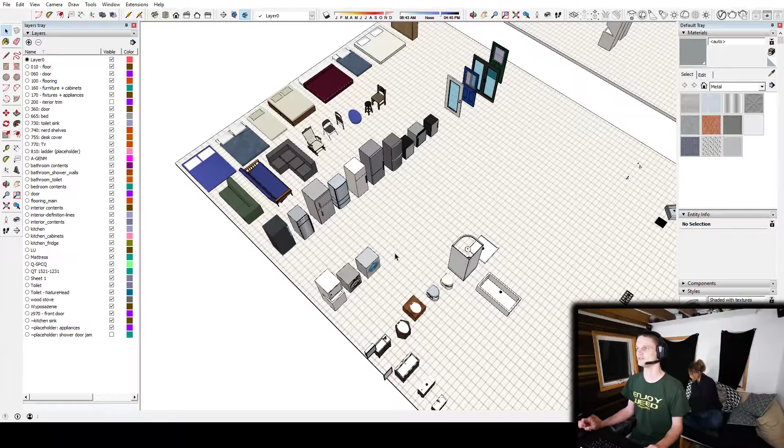I'm actually just working on a little file here with a bunch of pre-made bits in case I can't get a hold of the 3D warehouse when we're doing our presentation at the Jamboree in Texas, which we're leaving for in just the day after tomorrow. We're heading down to Arlington for the big tiny house annual convention, and we're going to be doing a live tiny house design just like we do on these streams.

So I'm just doing a little preparation. This is like I copied the contents out of different tiny houses that we've made on streams and made for other reasons, and I was just reorganizing the stuff here.

If you're just joining us, we're just waiting a few more minutes for some people to show up before we actually start the design. Start thinking about a length of trailer you want to start with and any particular feature that we might want to work into the design.

I like to assign space to something specific that the person who's going to live in this house might want - like what is their hobby or their work, something they're going to do with the extra space in addition to the necessities like bedroom, bathroom, kitchen. So give a little thought to that as well, so we can build a tailor-made tiny house specific for the intended owner's needs. But I'm just going to take a few minutes here.

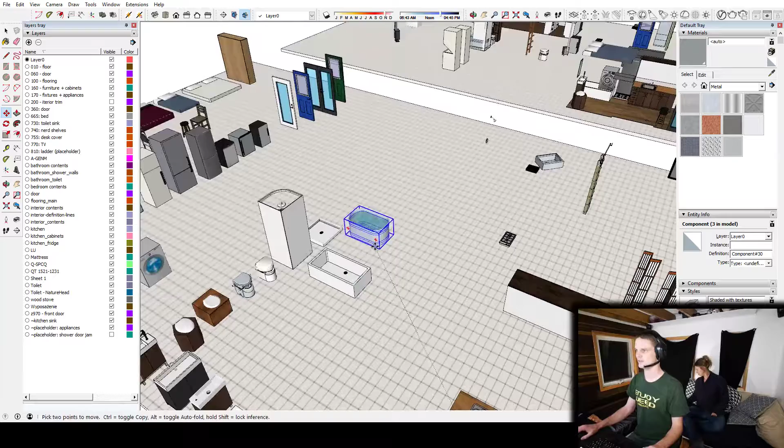In the meantime, I'm just moving some stuff around. You might recognize if you've been on previous streams, we put this horse trough-like bathtub. I actually found another bathtub from a different model, and I have all this kitchen stuff, which is really cool. I'm going to try to reuse some of this to speed things up - should be nice rather than building all this stuff from scratch. It's got a couple kitchen cabinet things already made here.

Just lining these up. So do we have any suggestions on how to get started? How many people do we got? There's only 7 people.

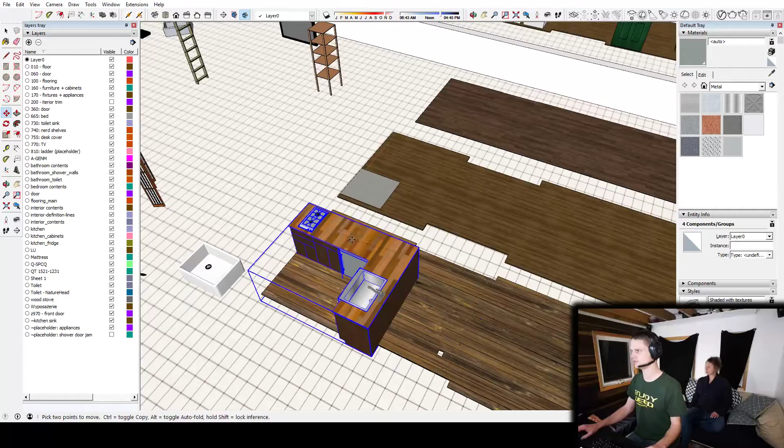It's pretty late, it's true, we are starting a bit later than usual. Batty's suggesting 24 foot. 24 foot, all right, then we shall do a 24.

So I'm just going to get the document or the file open here for 24, a standard 24 footer. It's actually going to open the different file here and get the 24 footer going. All right, so just opening up a 24-foot trailer here.

My headset just cut out, but I can see that it's still working.

All right, so our usual question is, do we want thick floors, thick walls, meaning like 2x6? The floor could be 2x8, or even bigger if you want to go crazy for insulation. The walls could generally be 2x4 or 2x6 - anything more than that would be a bit extreme for a tiny house. So let us know in the comments what you want to see: is this for a cold climate where we want to really pad it up and thicken the shell, or a moderate to warm climate where we just do standard 2x4 walls?

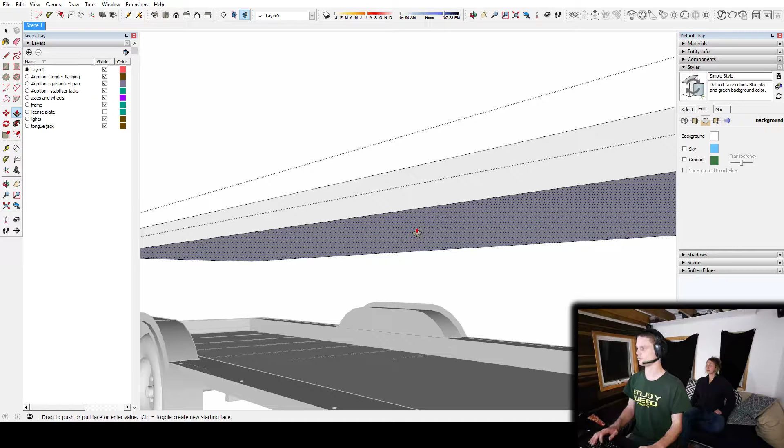Let us know what you think, and I'll just make a little initial thing. 2x6 walls, 2x8 floors. Okay, so we are going to do a bit of a thicker one. So what I'll do is pull this down - 2x8, maybe like 7.25 thick, and I'm gonna pick a wood texture to represent the wood framing.

So what we could do is set it in with 2 inches. 1 inch is probably enough, but let's see what we end up with here if we go with 2 inches.

Like this. Someone is suggesting we make one with a fireplace. Okay, haven't done one of those yet. Well, the fireplace is the heart of a home, right?

Hear that all the time.

So with a thicker floor, we're using the Iron Eagle trailer because that's what we've got already made. So there's the sunken cavity inside there. Fill that up, it's 6 inches deep. So when we do a really thick floor like this 2x8, it's going to sit up above the deck height.

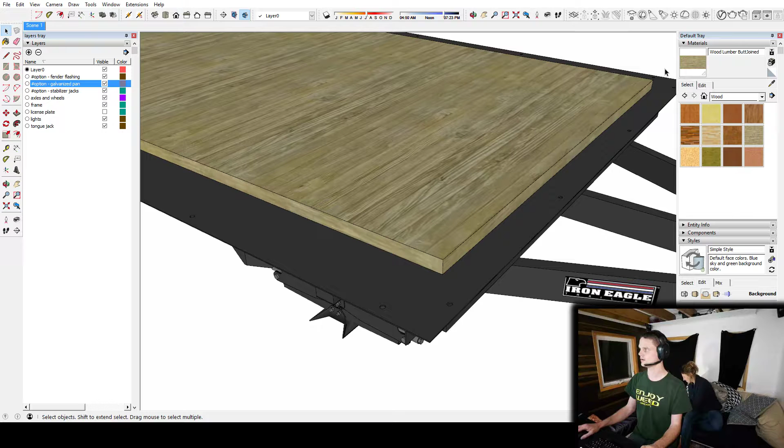That kind of goes hand in hand with wanting to insulate more in general, where we're actually going to lay down a thermal break on top of the trailer before setting down the walls. So just to represent that, I'll go like this. This is just a really rough block-out approximation of that.

Oh yeah, I've got to go around like this.

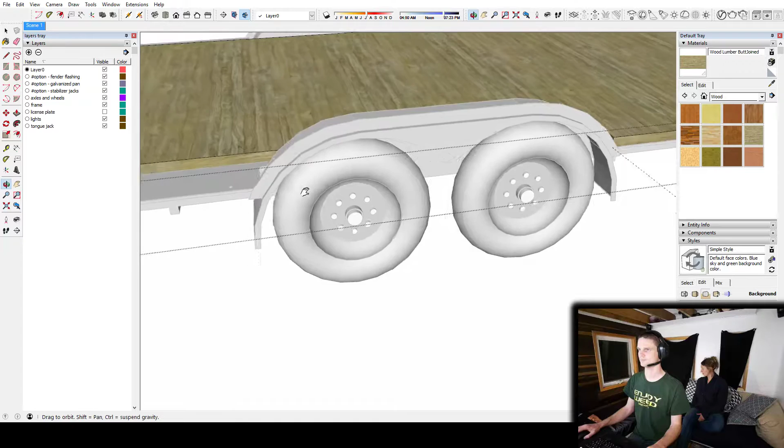This is just going to represent the framing and insulation and stuff that you'd lay down around the perimeter there, like that. And then of course we'll lay down a plywood subfloor. I'll literally just draw that right around this.

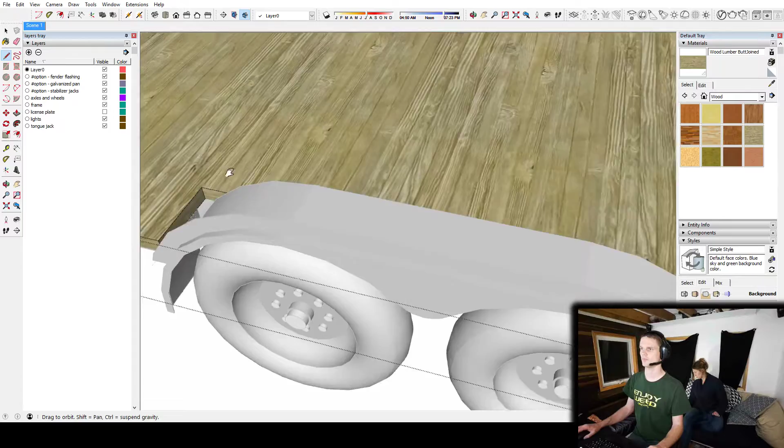Oh, and well, we'd go like this as well, in to there. Like this, line that up like that. And then start drawing that. I'll just draw around here to do the subfloor.

There you go. And then pull that up, we go 3/4 for the subfloor. Get a group, give some plywood. And then we'll do some walls.

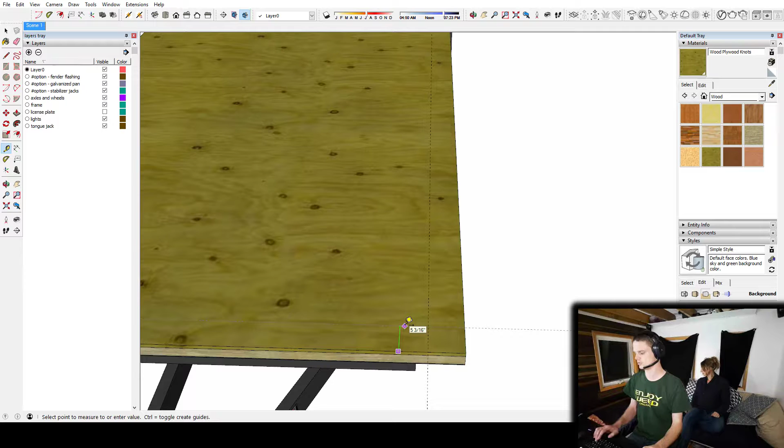So we're doing 2x6 walls. We're just going to say for now, for simplicity, that the sheathing is going to go on the outside. So this would be to the inner face of the finished wall. It would be 6 inches from the outer edge. Normally we'd do 4 for a 2x4 because it would be 3.5 plus a half inch.

Someone's asking what the weight capacity is for the trailer. This one is a 24-footer. Yeah, it's either, I think it's 14. I'll open the other file here.

But in the meantime, I'll start drawing the walls. Pull that up.

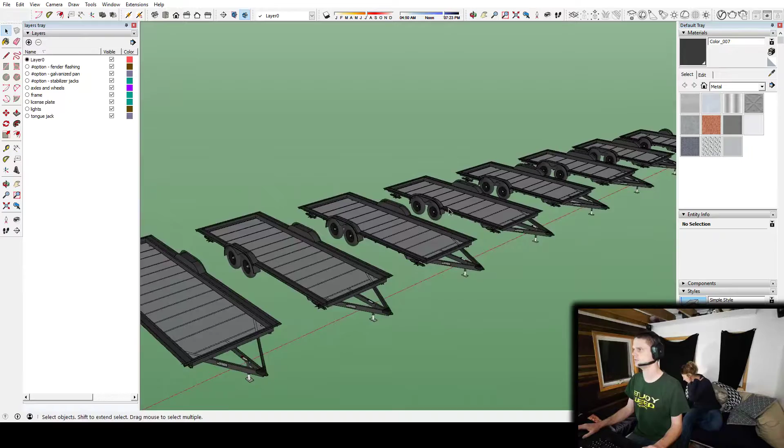Do we want to give, let me just check here, because I think these are the 5,000 and these are the 7,000 pound axles. Is this the 24-footer? Oh, the 24-foot, yeah. So you have to check with Iron Eagle directly, but I believe it is 14,000 pounds. Yeah, because ours is a 20-footer, and it's 10,000 pounds with 2 5,000 pound axles, and then they put 7,000 pound axles on anything bigger than 20 foot until you get to 28 feet, and then they put a triple axle. So short answer is I think it's 14,000.

Do we want to put some color or a texture on our walls for this build? Because they've always been white, which is fine, keeps it nice and simple, but we could do a nice pine blind. Get pine blind.

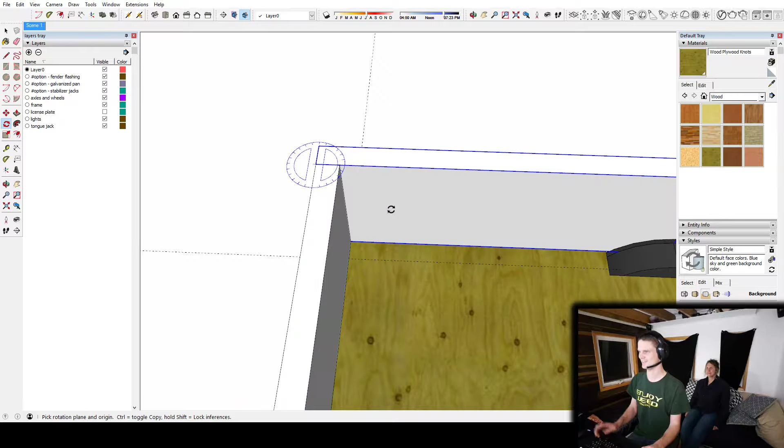I'm getting good at this. Well, as I say that, I get stuck in the model, but I'm getting good at this process. Slapping together the outer structure here. Slapping the base, man, slapping the base, man.

What if it's cedar and not pine? Cedar blind? Cedar blind? Has to be better than that. Yeah. Pine blind. Cedar.

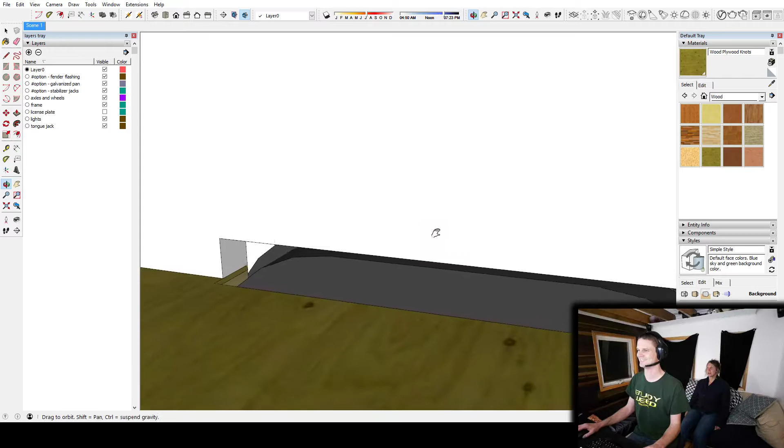Gonna go crazy here and use the offset tool because I'm a boss. Go 1.5, pull that out to there.

Is somebody making fun of me and you're laughing there? No, someone's saying slap at the base, man. Slapping the bass, man, I slap it a bit. I slap a bit of bass.

Okay, I guess, let's start with the references here. I want to close up these wheel wells.

We should do a live stream where we communicate solely in references to movies. I don't feel like that would be very hard. I don't think so either. I feel like that's kind of like part of my normal existence at this point. Human interaction, yeah, yeah.

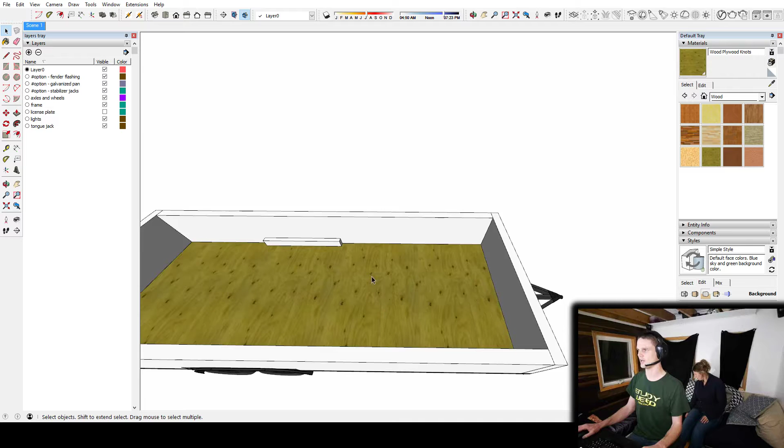Okay, so we got a shell here. I probably should have been asking ahead of time what you guys want to see in here. I guess so, fireplace. I'm gonna draw on a floor while we gather some more information from our viewers.

If you're just tuning in, you guys are telling us what to do, like how to make this layout, this tiny house. So we're working on 24-foot long, and we just put the floor structure in. We got 2x6 walls, so they're a little bit thicker, so you're only losing a few inches total. But let's keep that in mind. And we want to figure out what to put in here.

So basic things would be like, is a bathroom at the back or at the front, or with a tiny nest, our design, it's like a split thing where the shower and the toilet are separate. And then of course we need to balance that with where's the kitchen going? Is it going to have a loft with a bed? Do we want to go with like try to put a bed on the ground floor? If we do, keep in mind that that's going to take up a lot of floor space.

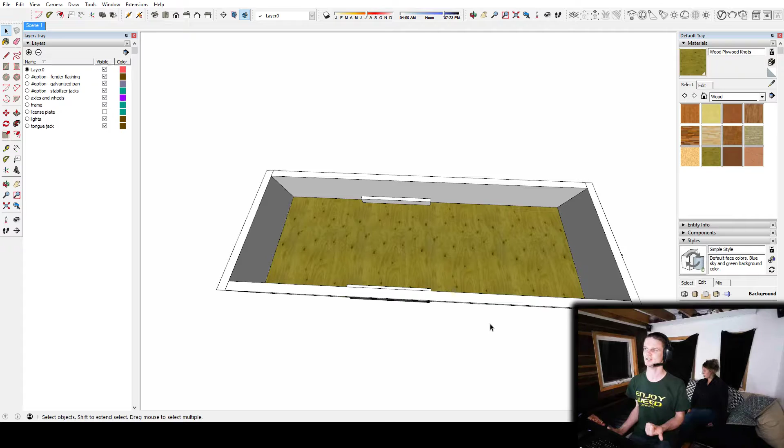The main suggestion so far has been to put a fireplace in. I got another suggestion for 2 queen beds. 2 queen beds, okay. So we could do like positioned, do we want them each on their own loft? Let us know in the comments.

While I draw in the floor here, oh, I can actually pick a nice floor texture from my thing. Uh-oh, what's going on here? Did I not? Oh yeah, we're good. So I'll just make it well, like a quarter inch.

Someone is asking if we've ever designed one with bunk beds. Oh, that'd be cool. Yeah. Can we do like queen bunk beds? Queen bunk beds, man, that's like a really good idea. I mean, queen bunk beds would imply that you're sleeping like 4 people, which is a lot.

Sorry, you're 2 couples, or like kids that are sharing a bed, but they wouldn't need that size. Go ahead, you could have the bottom as a couch, like a futon. I don't know, let us know what you think in the comments.

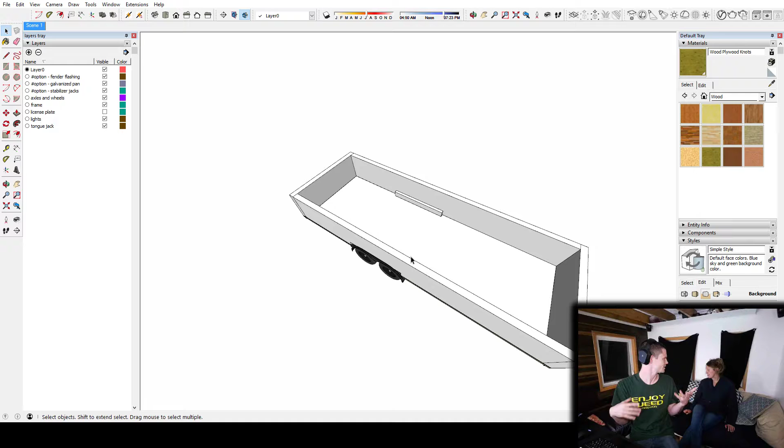What's the biggest vote? So we got 2 queen beds. We could put them on separate lofts, or we could do some kind of bunk bed thing. 2 beds on 2 separate lofts. Okay, I'm into this bunk bed idea, yeah, I want to keep that in mind, that's a neat idea.

So here's a fun question. I mean, these aren't great, but keep in mind that I can change the tone, make it lighter or darker or more or less saturated brown or whatever. But A, B, or C for the floor, and if you want some kind of modification, let us know in the comments. First one gets it.

C, okay. Now, I think I need to copy the object actually in order to get the thing. There we go. Oh, there we go, okay. And then leave it like that, or I think that looks pretty good actually. Let's just leave it like that.

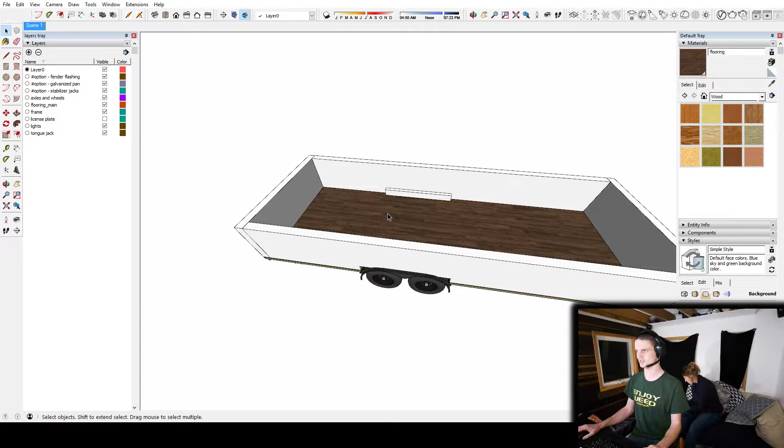So we want 2 lofts is what we decided, is that right? So how much space do you need under the loft? I mean, 2 queen beds, either there's a lot of people living there or you're expecting guests, in which case you might need to account for leaving quite a bit of headroom so that tall people don't bonk their heads.

So what do you guys think for headroom under the loft? So in the tiny nest, I'm like a little under 6 feet, like 5'10 and a half. Our loft height is 6'4, and that's what I usually default in these designs too, because I know that it's safe for me anyway.

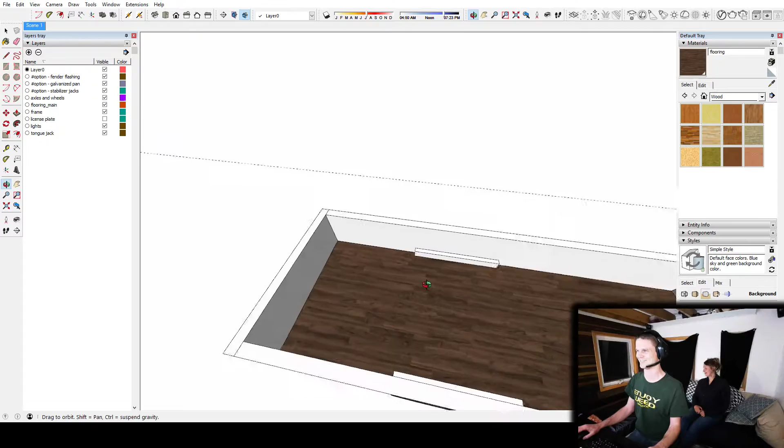So I guess I'll just go ahead and do that unless you guys want to see something different than 6'4 for underneath the loft. Do you have something to say? Jake is the size of Shaq. Yeah, 6 foot, yeah, I'm like 6'10. So someone's saying 6'4 it is.

Is the consensus bunk beds? I kind of like the double loft idea. You know, okay, do double loft. The double loft was I think the first suggestion.

I really like bunk beds, so I promise we'll do bunk beds when we get back from the jamboree. So in a week or two, a little over a week, we'll do another stream and we'll do something really fun with bunk beds. But I do like the double loft because that is like a pretty practical thing that people would tend to want. Yeah.

So we want two queen beds. I just happen to have a bunch of crap here, not sure which one's queen though. I think this is a queen. How wide is a queen? Tell me on the stream. 60 inches? Somebody Google it.

Someone tell me the width, Google it. No, but oh, this is 60 by 80. Perfect, there we go. Yeah, we don't even need to Google anything, man.

Okay, so I think this one's probably the nicest: double loft, one for him and one for her. That's what the suggestion is, and they each get a queen. That's pretty lavish, but you know, loft space.

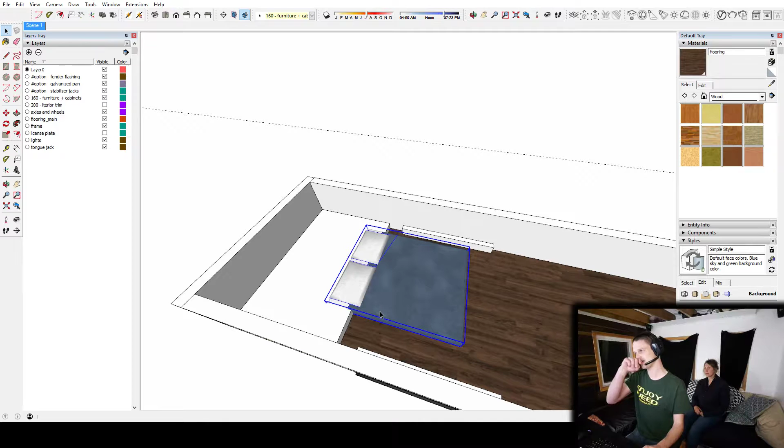This is the thing, as long as you are cool with being underneath a loft a lot of the time, then I say go for it. Put lots of loft, because what? Are you laughing at me or the comments? I can never tell, I don't even know what's happening.

Okay, lots of loft. Lots of loft. Lots of loft. I'm gonna color this loft the same as the floor.

What was I saying about lots of loft? Sir, lots of loft. Come on, sir, lots of loft. Come on, give me some love here. That was good.

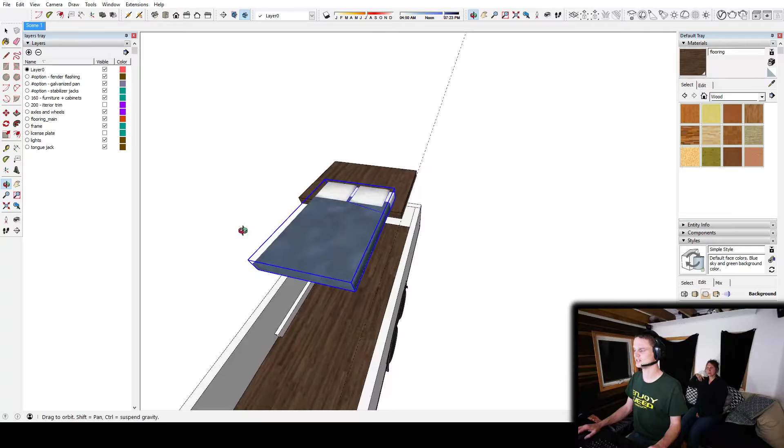Okay, put this like this. Oh yeah, so the queen is nice because, well, I would almost orient this the other way then, especially if it's each for only one person. You don't necessarily need to get in and go onto your spot, like if we have it oriented the other way, you just climb over me in the morning. But either way, this is going to be good because we can tuck it in, and even though there's two lofts, we can minimize the size of each loft. Is what I'm getting at here.

Right? Are you with me? Yeah, I'm with you. Okay, let's go like that, for lots of loft. That was really good, it was so good.

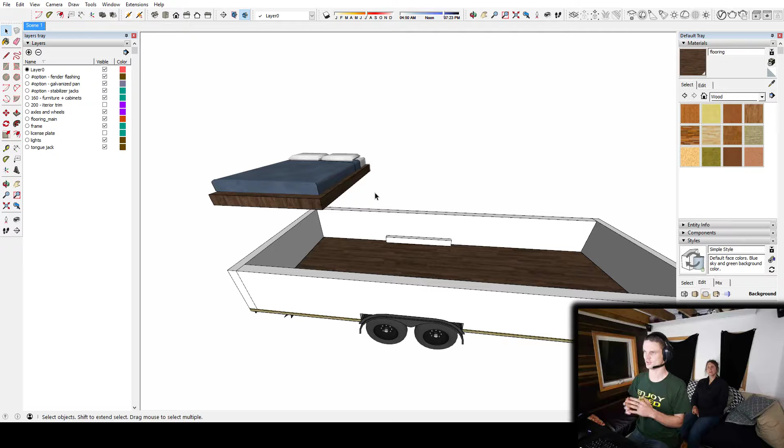Love you. So, okay, so access to the lofts. It's really good to work on tiny houses with a priority in mind, like we want to fit two lofts each with a queen size bed as the priority. So we're gonna put that in first and then see what we can fit around it. So the next question is access to the loft.

This is just big enough for a bed, so assuming you'd want some kind of nightstand type of surface, pull this out like at least a foot. But how far should it come out is the question for you guys. And then I'm going to duplicate this and put it on the other side.

And do you want me to change the color of the beds? Go ahead and shout out a color if you want it changed. Floating nightstand, floating nightstand. So I guess you could just use hover attach it to the wall.

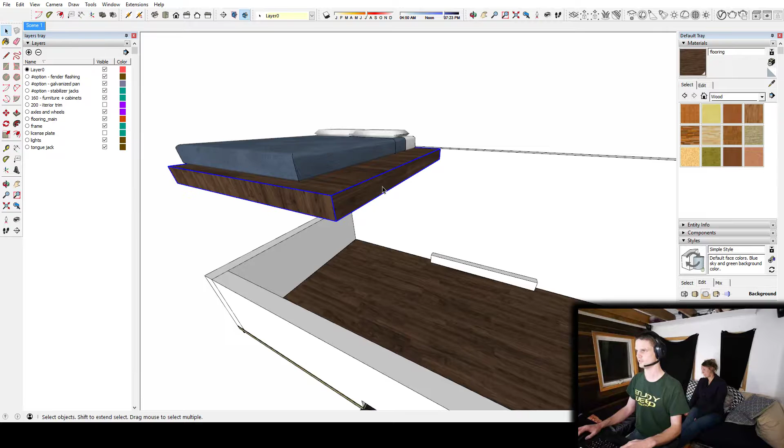Pull it out 2 feet. 2 feet total or 3 feet total? Because I already pulled it out 1 foot. Oh. So this is 2 feet total, that's what we're looking at here.

Now I am gonna make... so a property of going with thicker insulation is that you run the risk of running out of headroom. 13.5 feet, so that this is as high as the structure can possibly go.

And I'm just gonna put, where is it, oh glass. Glass, sure, there. Lock this. Okay, so that is the height, that's the max headroom we can possibly do.

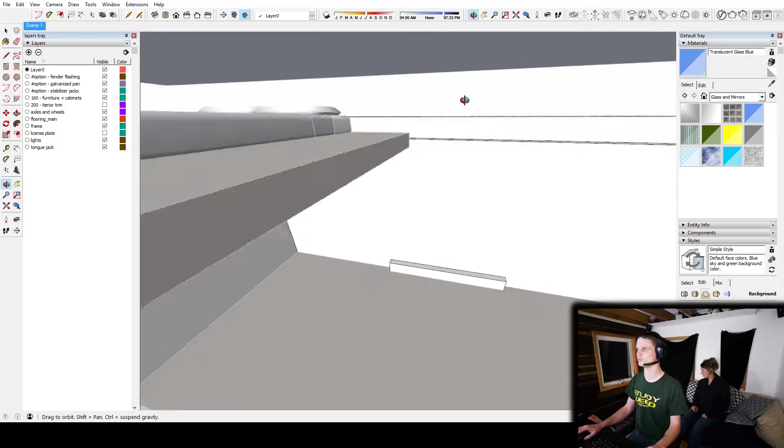So just to represent, we're not going to do the roof. We found that there's just not enough time to do a whole roof assembly in a short stream like this. So instead what I'll do is pull that wall up to max so you can get a sense of where it is, and I'll resize this so it's not in the way, but it's still there as a reference.

Just keep in mind that this does not represent the amount of wall that will be inside the house, not only because if you have a different shaped roof it could change it, but also because this top surface is literally the peak of the roofing. So assuming you're doing a... maybe I should draw that in.

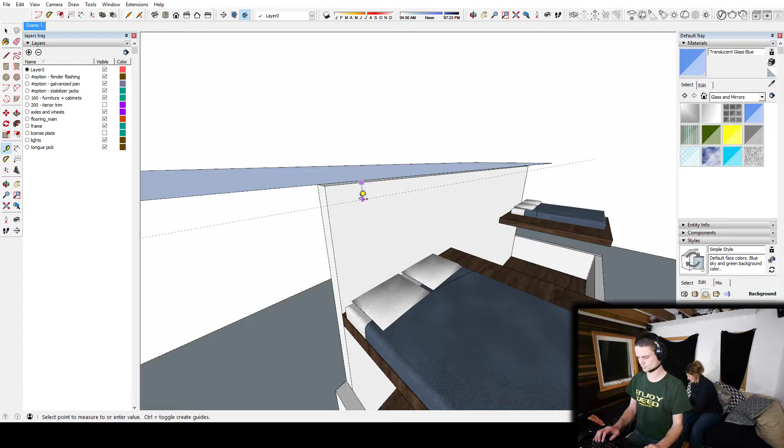If you're doing a 2 by 8 floor, you're probably going to do a 2 by 8 ceiling as well. So we're looking at 8 plus like 1.5, that's 9.5, and pretty much a foot really of layers. It's like your ceiling, your framing, roof sheathing, and then roof material. So right now in these lofts, we have a maximum of 3 foot 5 inches.

So just keep that in mind. Yeah, why don't we look at putting some other stuff in here? So someone is saying the beds are oriented wrong, okay, and Devin Connor is suggesting we put the bathroom under the forward loft.

Okay, I'm just going to make a mark on this.

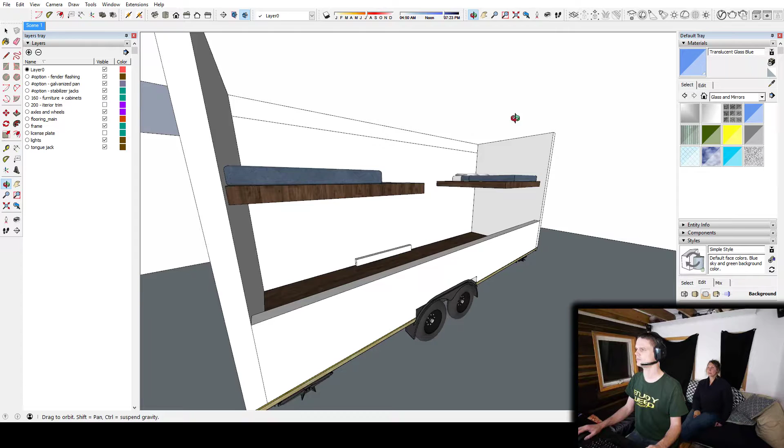So with the beds, my thought was if only one person is sleeping in each bed, orienting this way minimizes the amount of space the loft needs to take up and also maximizes this space. I guess it depends, because I'm imagining a shed roof, so then it would be about whether you could sit up in bed.

No, I'm imagining the same as you. I think they're oriented correctly, but if you're having a different kind of roof, that might affect it. If it's a his and her setup, you could orient them both with the pillows. You could have a gable roof with circular windows on both ends, and then orient the pillows there, so you sit up in bed and look at each other from across the way.

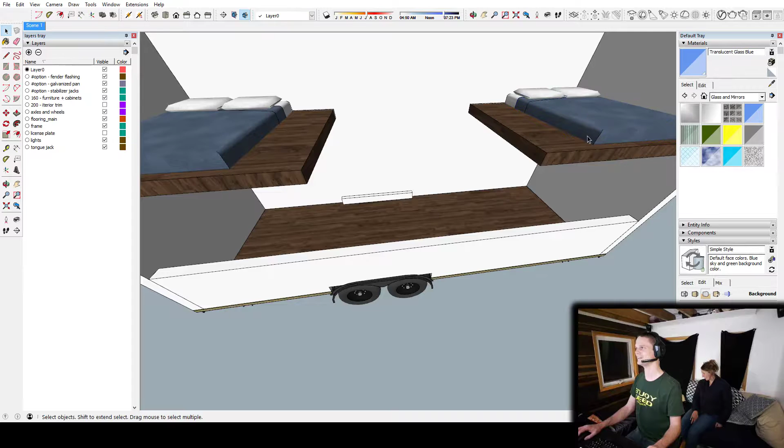But let's leave it for a second, because I think a big thing before we decide to change it or leave it as a concrete decision is that access to the loft is a big factor. We need to know what's going to be below it before we can decide how you're getting up there, and that can affect how much space you need to leave.

Is there a bathroom, stairs? Yeah, let's put the bathroom in. I'm just going to bring that down.

So what do we want to do here, just to end it? Yeah, that's what was suggested, at the end. So I'll grab a shower. I don't know that there's really anything better than a corner shower for a tiny house.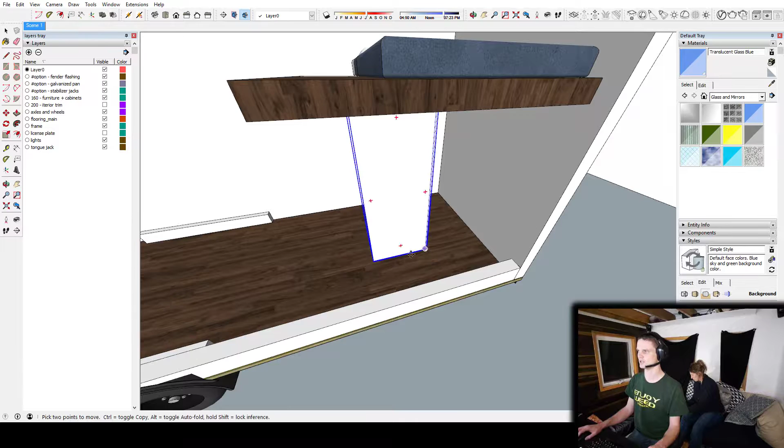Maybe one option could be a stall type thing, like a U-shaped cavity, so that you can put something else beside it. But you kind of put stuff beside it anyway. People are into the corner shower though.

Okay, so I just need to shrink this to this size, and I'm just going to undo the bottom of that so that it's like flat color.

Well, just because of the way we've got this, let's just go with it. It's funny, I always feel like we're making something different, but a lot of the time you end up doing something very similar, because it's just the natural feel of the space, you know?

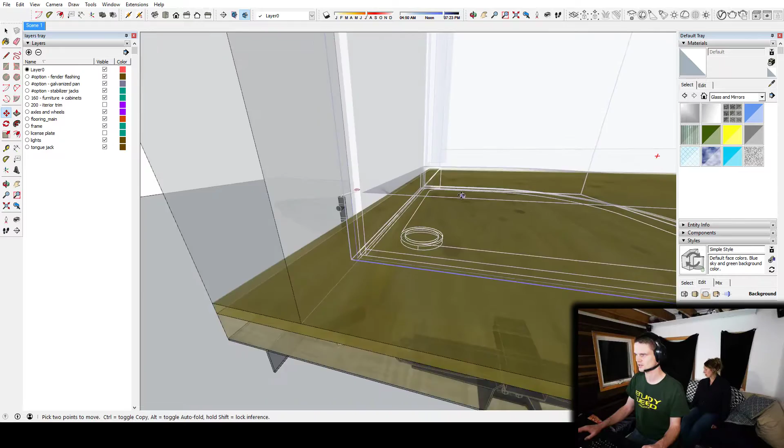So we could go there. Something that came up recently was someone complaining that in every tiny house, when you walk through the front or look through the doorway into the bathroom, you see the toilet, and that's not aesthetically good. I guess the problem is tiny houses have a long walkway, so it's typically best use of space to fill the sides, and then you end up with a central doorway into another space.

As opposed to putting it on the side, because then you've got to leave that whole wall open so that you can go in the doorway.

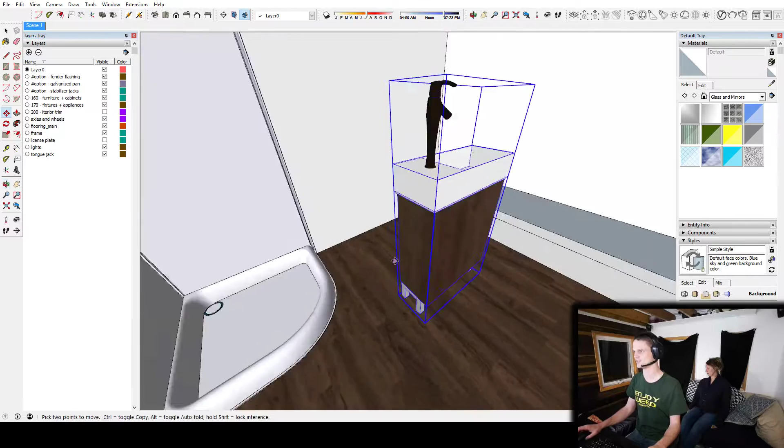Okay, here I've got an idea. We could do something like grab this one. This is actually awesome, grabbing all the stuff that's pre-made, because it's all stuff I've used for tiny houses in the past, so I know it's relevant.

Sorry, I'm reading comments. This is good. Someone says, I don't know, I'm not getting this. Someone says, 'so one wide and two deep, lol,' and then they said they couldn't help themselves. But I don't get it. I think it's a dirty joke. Okay.

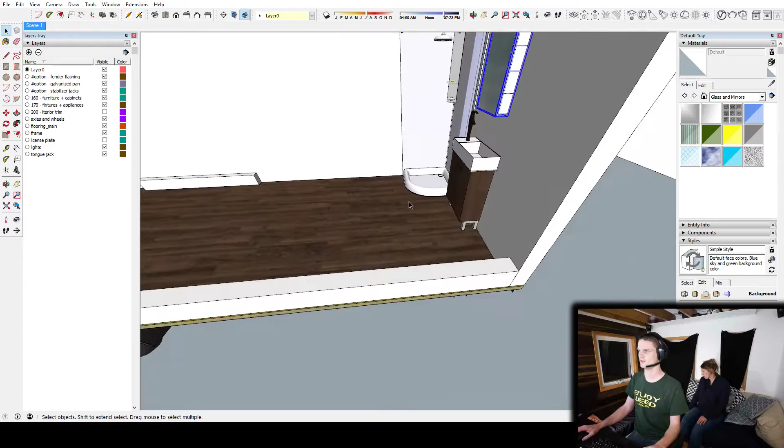So Batty is suggesting an escape hatch, either in the loft or one of the lofts, which could potentially drop into a washer dryer combo. Oh, I see, to throw your clothes down. That would be really sweet. Patrick McCowan is saying to pull the shower forward and put a toilet behind the shower.

Okay, let me just, I'm literally moments away. I'm gonna make this a nice thin wall. I'm just about to make something here. Just give me one sec.

This is what I was thinking was like... Okay, so Devin Connor is asking, if he wanted to save himself time...

Sorry, am I? No, go ahead. If he wanted to save himself time and materials, what would you think about using an already enclosed trailer to start a tiny house? Would it be able to support it? I guess it depends. I don't really know, are you talking about like an RV, or a pre-built tiny house shell that's already a tiny house?

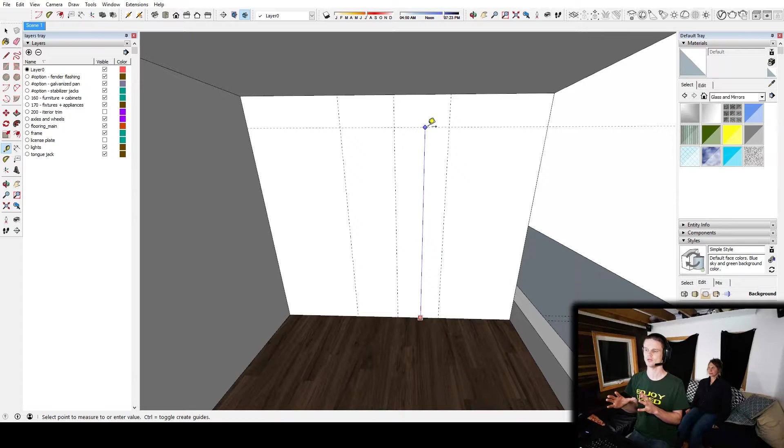My initial comment would be it can seem like you're saving something by picking up some used trailer or an RV and tearing it down, but that can easily turn into way more work to repurpose something, as opposed to starting from scratch, where you're putting in each element and deciding how to do it. It's like you're always moving forward, whereas if you have to fight something that's already there, it can be a struggle. I'm only speaking from having gone the new construction route with no experience tearing anything down, so keep that in mind. But yeah, that was a really poorly executed answer to that question. But there you go.

If it was even an answer to the question being asked. But regarding the toilet, this is what I was thinking, tucking it into the right side here and putting some shelving here. Let me just show you. I was already halfway to doing it. Let's do this like this. It might be a little bit - oh, it's probably too deep.

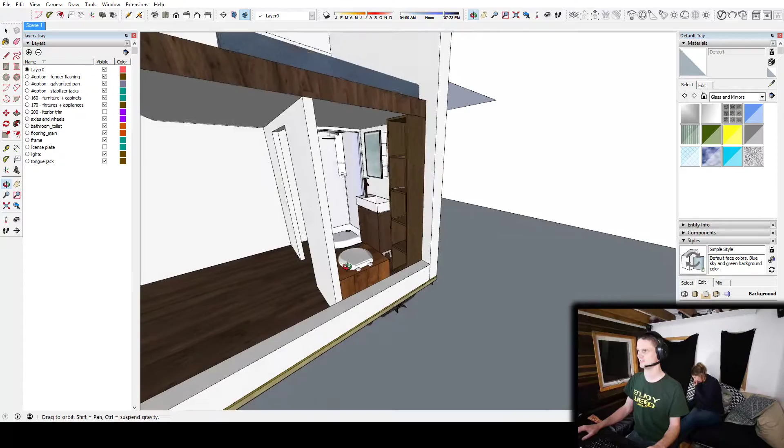And I would probably go like, make this white. Oh god, what's happening? And then widen it a little bit maybe. So yeah, this is what I was thinking.

This is an attempt to solve the issue of not wanting the toilet visible through the doorway, but at the same time keeping the doorway in the center so there's space for other stuff further back. But there was a comment about putting the toilet behind the shower, because I'm assuming what was suggested was, this is an extreme example, something not oriented this way but positioned that way. That would lead me to think the bathroom would turn into a long strip along this edge, more so than at the end, which is possible.

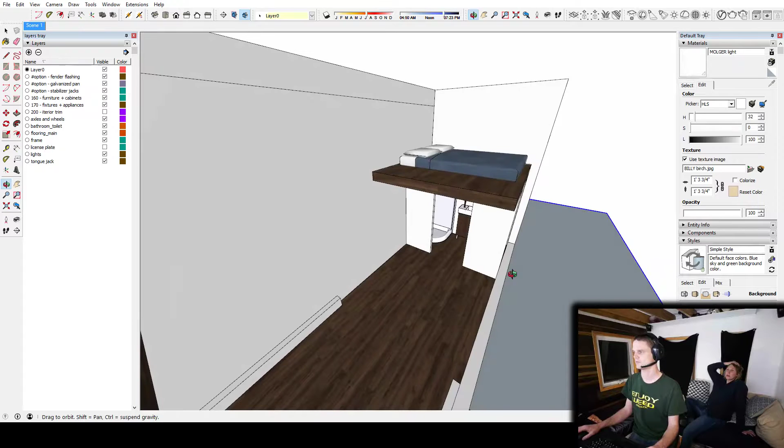You could close it off and then have the trap door, like how you had it before, so it was a bit longer, and then have the trap door and put the washer dryer combo in the bathroom. This is a good idea, I like it. Okay, I've got an idea how to salvage this then. I have a feeling we're not going to finish this house because we're spending a lot of time on these parts, but that's fine.

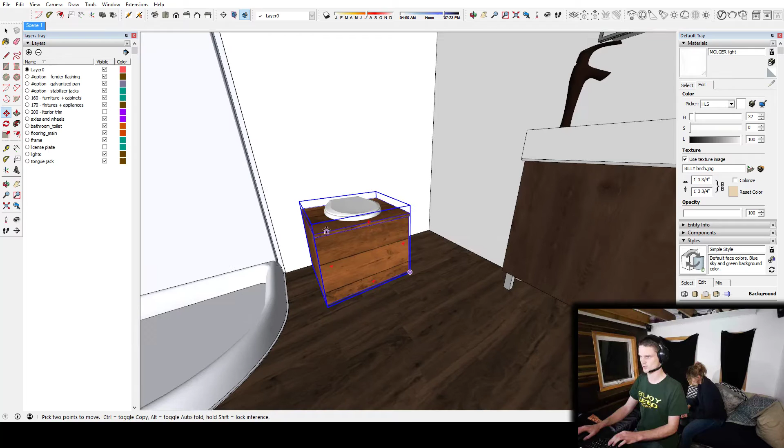So now I'm thinking we go like this, and then we go like that, and then we tuck this bad boy - I'm making an executive decision, by the way, because we need to move on. But gonna go like this, but can still have some kind of storage in here for toiletry related things.

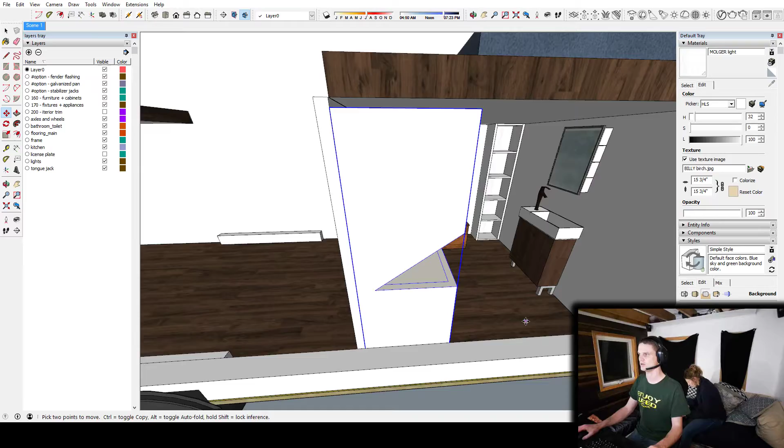I'm just gonna, for fun, because someone did want this type of thing in there. Oh, it's so tall - oh, no, it's not, oh, it actually fits. Someone did want one of these in their tiny house to have the separate units there. And that actually fits perfectly. What is it actually like? Wow, okay, so that's an option.

And then I guess the only problem is, I don't think you would have a chute for clothes because you're not...

I don't know, maybe this is a question for tiny house people. I should ask at the jamboree. Do you get changed in the loft? Well, kind of. Sometimes I'll change my shirt up there, but then I'll walk down the ladder and put on pants on the ground floor, because up there I'm laying down flailing like a worm trying to get them on.

That's a question that doesn't get asked but really should, because people get changed in all areas of their house. You get changed half upstairs, half downstairs. Yeah, exactly, you spread it out.

But the thing is, this is something you'd work into the design and then find out in practice that it wasn't useful. Like if you put a chute up here for the loft, thinking when you take off your clothes to go to bed you'll throw them down the chute, but then you'll find you take your clothes off before you even go into the loft. So it ends up being a fully integrated part of the design that doesn't get used. I think it's such a specific thing to tiny houses, it's not even something you can test.

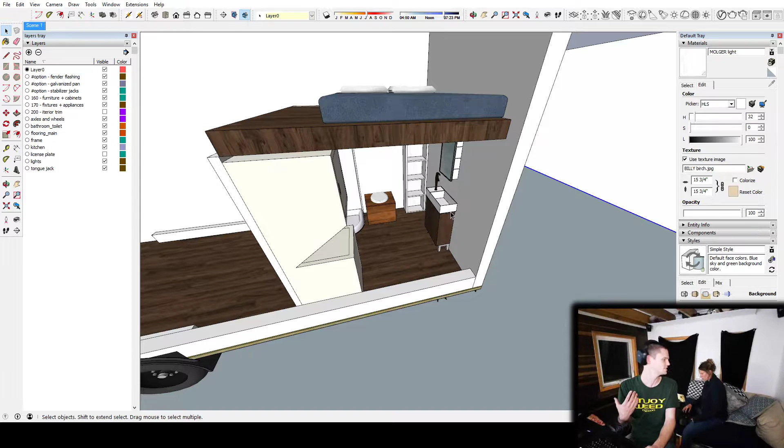Like with your kitchen, I tell people to keep track of your prep process - do you wash stuff, then bring it to a cutting surface, then a cooking surface, are you going into a pantry all the time, going to the fridge all the time? Then make sure your design doesn't create some weird interference situation where when you open the fridge you can't get around to where you want to be.

So that's something you can do a thought experiment on before you design. But something spatial, like whether you have enough room to get changed in the loft, is something you won't know until you're living in it. So I'm going to stop rambling and just go.

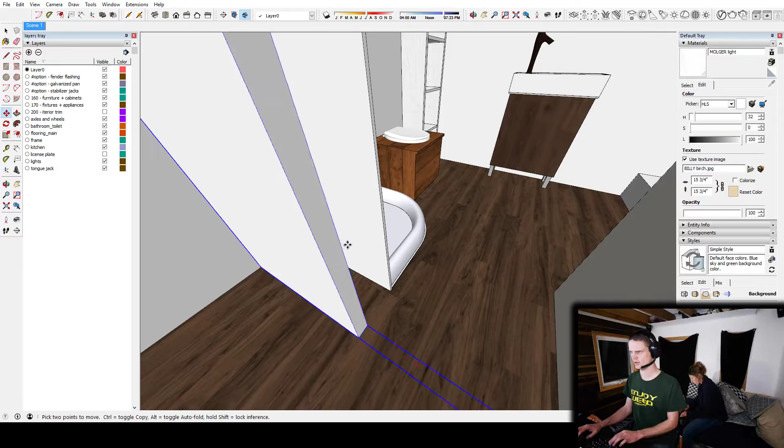Betty is saying you could just put a laundry basket thrown in if you did want to use the hatch idea for your clothes. I mean, you could - there's definitely the option to put a hatch into this loft if you really wanted that. I'll just leave it at that. But I'm going to go ahead with the laundry being in here, because that's cool.

In the bathroom, like that - you walk in, and you know what, I'll tell you something, you're most likely going to take your clothes off when you're in the bathroom before you have a shower. So it does make sense to have the laundry in there. Yeah, exactly, just having it in here.

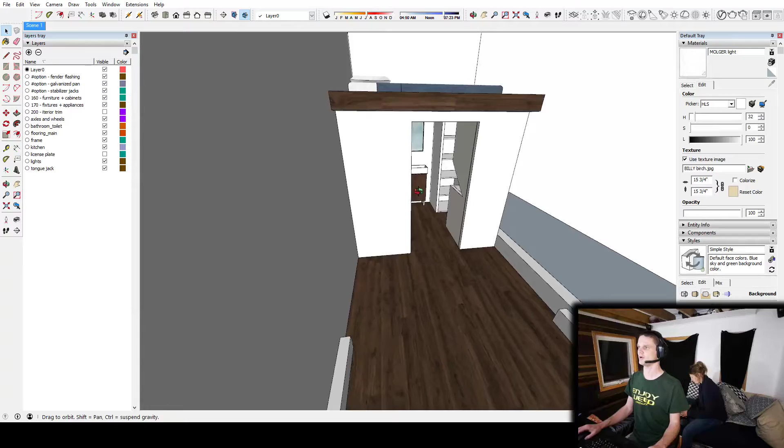And let's just say this could also be general storage, so we're using up a lot of overall space here, but we won't need to allocate much space elsewhere in the house. So this shelving isn't necessarily what you'd have in here, but it's a good representation of how much space we'll leave for storage. Anyway, we need to move on, we've only got about 20 minutes left.

So where is the kitchen going? Is this going to have a living room? Is there going to be a TV? Do we need a seating area adjacent to a spot where a TV can go? Do we want a corner kitchen, or a long kitchen along the back wall?

I'll just hijack this stream, but if you had a projector that projected in the middle of the two lofts, you could both lay in bed and watch TV. You mean like against this wall? But the other wall, because the pillows are in that wall. Yeah, against - yeah, okay, sure.

Is that what we should do? I don't know, let's see what other people are saying. The thing is, you could say yes we're going to do that, and forego a seating area downstairs. So let's try to take a shortcut here and copy - someone's saying we'll call it Netflix and don't touch me.

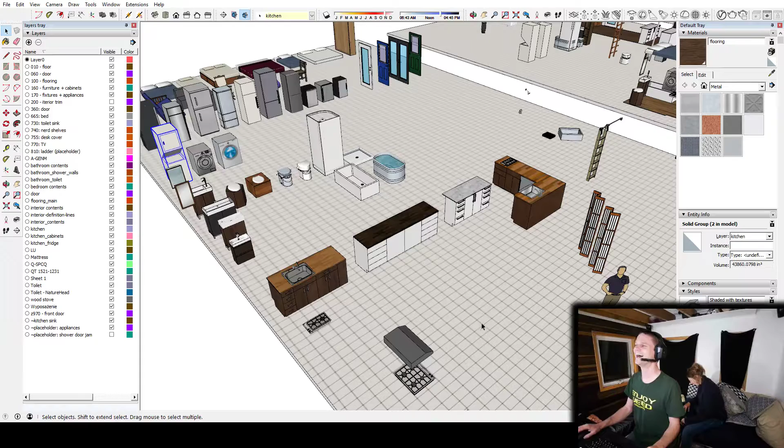Well done, Connor. Oh, that's good, that's good. Well played, sir, well played.

That's awesome. Okay, so for the kitchen, I got a couple kitchen components here we can just grab and slap in there quickly. So what do we want to do for the kitchen? What are you guys envisioning for the rest of this space?

I'd think the door is going to go here, and we could have a corner kitchen, and then this maybe is left for access to the loft. Then this side we could put some seating just for a living room.

I don't know, speak now or forever hold your peace in the comments for any specifics here. Otherwise I'll start slapping some stuff in just to fill it out so there's some semblance of a finished space.

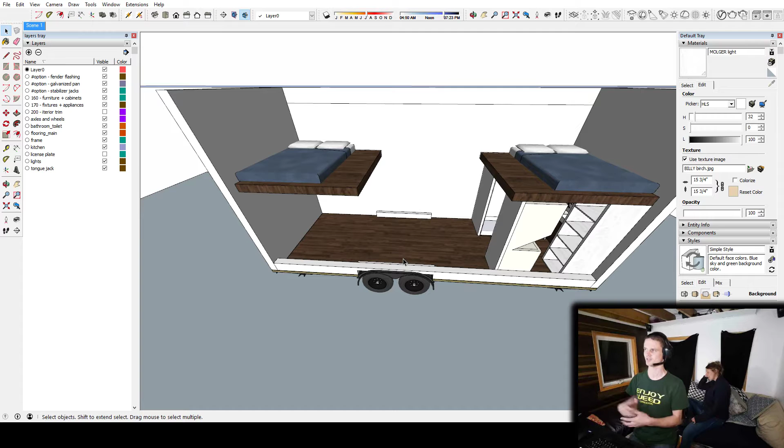Because I think, don't know if they want the kitchen under the loft or between the two. What I'm seeing here is an issue with loft access. Like right away, where's the door gonna be? Because if the door is there, you can't have a ladder.

It's looking like we're going to need a ladder, or we're going to need to allocate this entire back wall to stairs, like two sets of stairs. Alternatively, we could put one ladder here and one ladder here.

So Josh Stoss is suggesting the door in the sitting room since you're sitting. But we don't know where our sitting room is yet, do we? Or what did he just suggest? Well, I'm just thinking if there is going to be - what the heck am I doing here?

Okay, Batty is suggesting a double Tansu staircase, which is kind of like a staircase that has steps or shelves. I can show you it if you like.

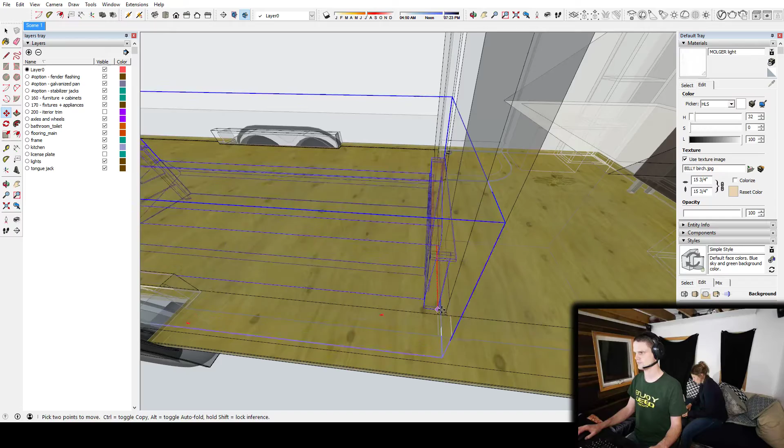Oh, that's not - this needs to be more like that. See, I was thinking some kind of seating. That is humongous, why is that so huge? It's at a bit of an extreme angle there, but whatever.

So like what I had been thinking was seating there, or - yeah, I can change it. So while we're still pondering.

Devin Connor suggested leave the loft access on the right wall above the axle and make the kitchen on the left wall between the two lofts, living room under the other loft.

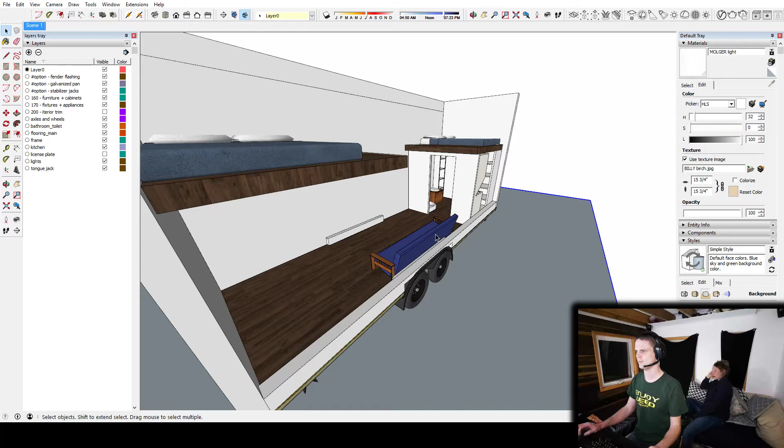Okay, say I caught on partway through, so can you repeat that? Leave the loft access on the right wall above the axle and make the kitchen on the left wall between the lofts, living room under the other loft.

Okay, so let's go like this, and okay, so I can - so it'll be a fairly small kitchen. Right.

Oh, see, I know a problem that we've run into here - it's gonna be tough to fit a door underneath the loft. So I think it has to be here.

Yeah, definitely. And then, okay, so I'm seeing something like this, I'll just let me draw this in. Wow, this is so - why is this model so enormous?

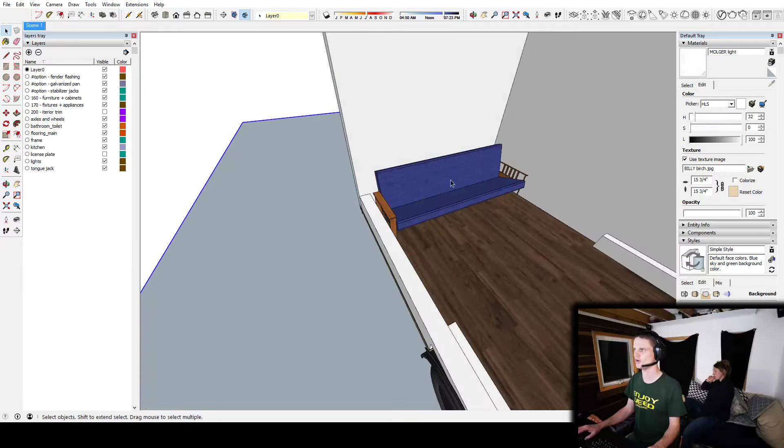Oh no, okay, hang on. There's a corner thing, two double corner stuff. Okay, I'm gonna grab this one. Okay, I got a plan.

Almost - oh crap, I gotta grab all the stuff with it. Oh, this is from our last one of our previous streams. Whoops, what am I clicking here? No, did that not work?

I want to copy this. There we go. Um, what am I doing?

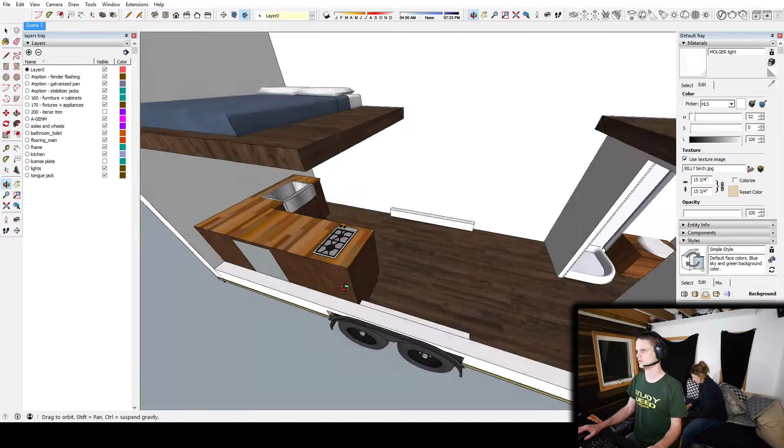I keep completely juggling these thoughts around way too much. That's not gonna work at all. I think it does need to be a long one.

Oops, grab that with it. So it's simply because of the way we were oriented here. I'm gonna put the kitchen - or no, it has to be the other way, it has to be this way.

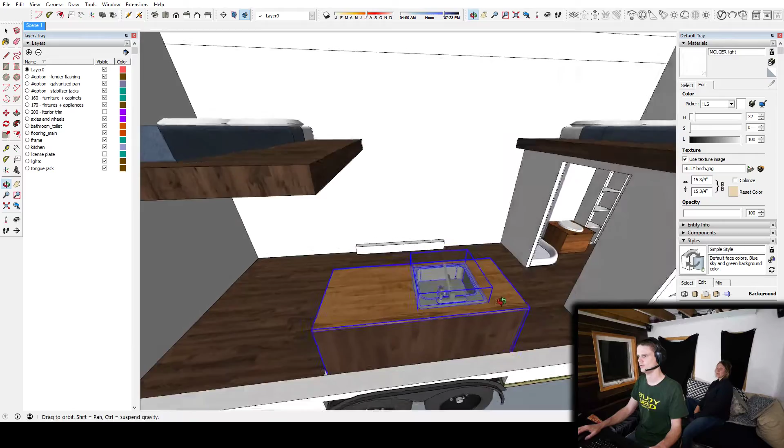So you could kind of get away with like - or I could just, I can't do that. Pull that out, does that work? Yeah, so I can make a long-ish kitchen. I guess this is actually pretty long, if I go like that.

Yeah, I really think corner, and it's funny because of course we did this in the tiny nest, so I'm biased this way, but I feel like corner things usually make the best use of space because then it's like, do I bring this all the way to the corner or do I try to put something else in there? And if I do put something else in there, like a fridge?

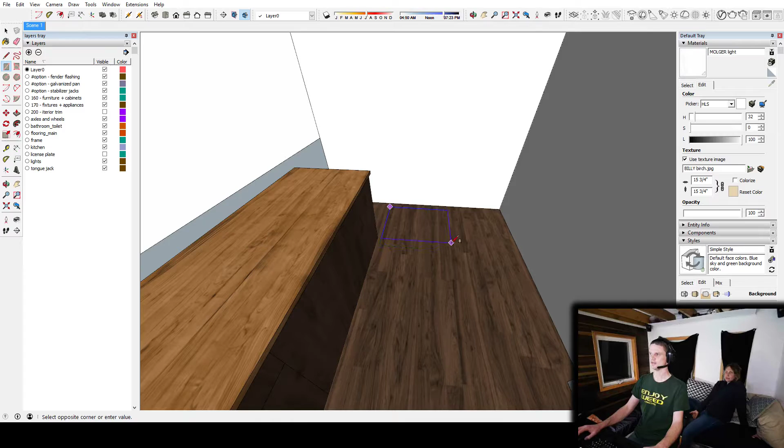Yeah, we could do the fridge, but then that means you need to leave the space in front of it open. But typically, to get the most stuff against the walls, or to get the most stuff in a tiny house, you want to line the entire perimeter, and then walk through like an alleyway. That's just thinking from a purely practical, pack-it-as-much-as-you-can point of view, instead of making a unique aesthetic. So there's a suggestion for a corner kitchen and put the sink side against the shower wall.

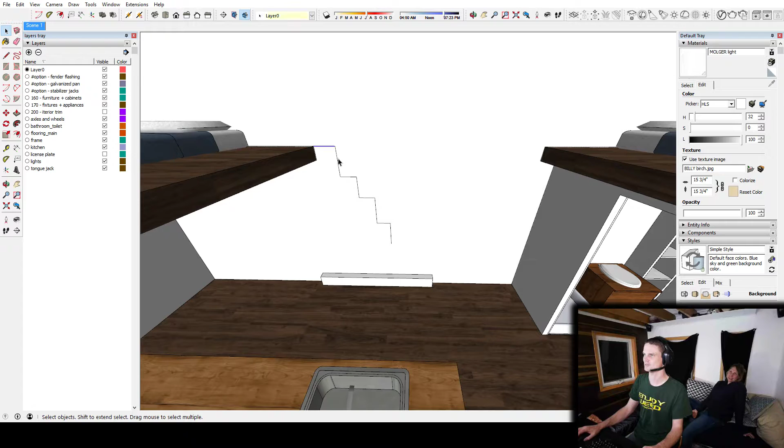Let me draw this in, because part of what I'm doing here is the stairs. This is going to be atrociously roughly drawn. This should be lower. How the heck do I want to do this?

If I just draw it, how many inches? It needs to be at least... well, 6 inches would be enough, wouldn't it? No, 8 inches, and then at least 12 down. 8, 12, 8, 12, 12, 8, 12, 8, and 12.

Copy, move. And I want to go, let's just say 1 inch. Oh, can I not? Ah, that does not work. Okay.

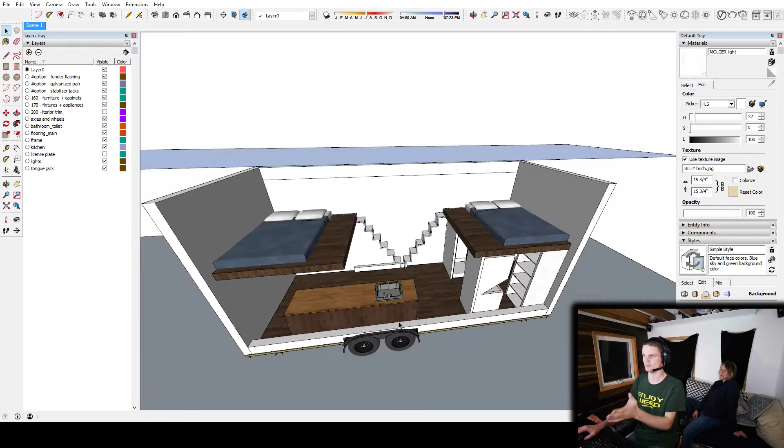Sorry, I know I'm not talking very much right now, but this is when we talked about stairs. One of the earlier suggestions I was moving towards was to leave one wall between the lofts for stairs, and put the kitchen on the other side. So that's basically where I'm at right now. And of course the door needs to go pretty much here. Actually, why don't I just put a door in there?

White, black, green, or blue? Get that interactive audience back in the game. You guys got to pick a door. Well, actually, it can't be the double door. White, white, blue. Blue. Okay, and then gray. No, it's too late, Mr. Chance, that's our door. It is our door.

So you can see how tall it is, right? It comes up past the loft. You could make a custom door and squeeze it under the loft, but it gets pretty tight.

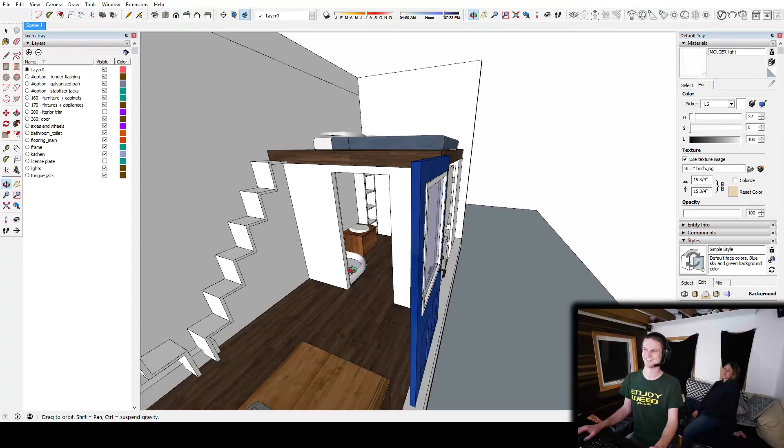So this is where I'm at. You come in, you could turn right, and this is going to displease someone, I can't remember who it was by name, but when you go in, you're still going to be able to see the toilet because of the angle. But we could mirror the bathroom, there can be a door on the bathroom. Yeah, I could. You know what? I'm doing it, I'm doing it.

This is the power of SketchUp. You ready for this? I really hope it does. It works now that I said that. Bam, oh snap, please snap to where I want you to be. Does that work? Oh, mirrored, snap. Okay, so sweet, there you go, cool, bathroom has been mirrored.

So now when you go through the front door, you don't see the toilet. So cooktop, whatever, can go on here. Let's wrap it up pretty quick here.

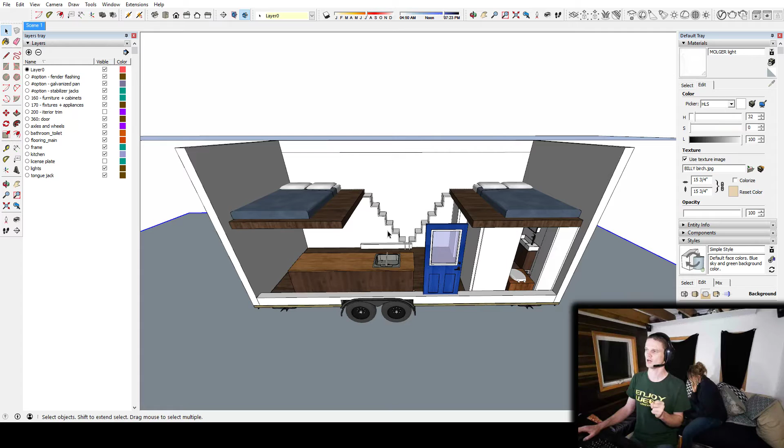I'm willing to make one more adjustment if you guys think there's some major shortcoming with this. Obviously you just make storage underneath here, right? The simplest way to finish this off would be to slap in some kind of seating or some use of the remaining space here. I could shorten the kitchen a bit, or we could put that fridge in there and just say screw it for use of that back wall.

Could put like a corner couch, shorten the kitchen. You could shorten the kitchen. Oh, you know what, okay, I've got an idea. I'm gonna shorten the kitchen, put the fridge on the other side under the stairs because that's a good use of under-stair space. Yeah.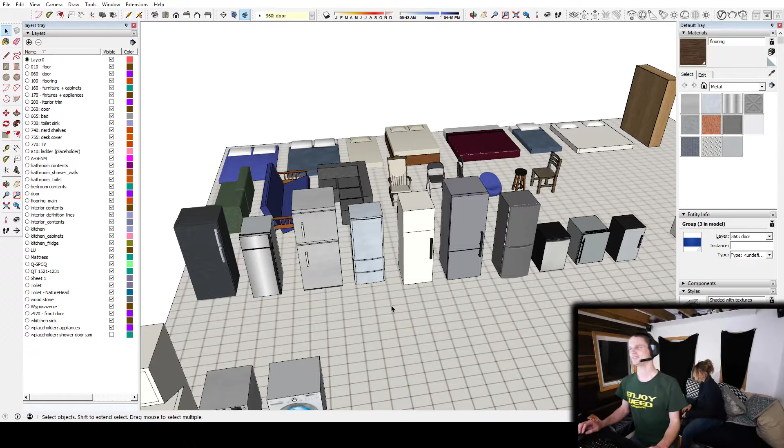Pick a fridge, give a numerical value from left to right, left being 1. First comment gets the fridge picked, and we'll resize it if we have to. Batty says 4, alright, and we'll tuck that. That's a good one because it's a good size already. We could actually probably tuck that under that step, not that these steps are even remotely proper in their size or anything.

But we're getting somewhere. So fridge over there. I would say cooktop, let's just grab this standard one that I like so much, and put it down here.

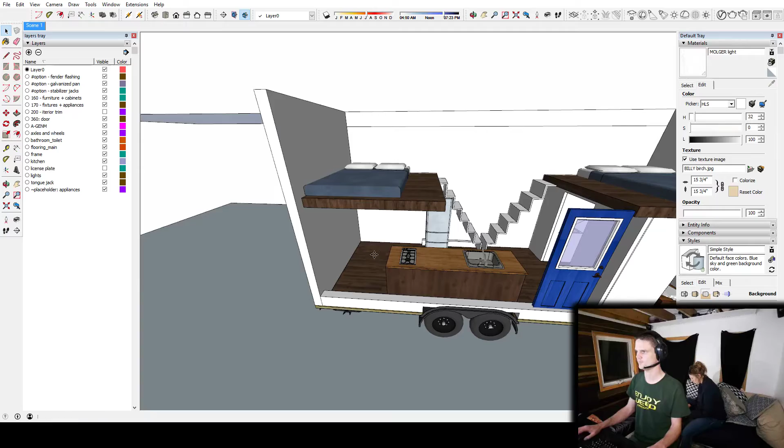Then we put in this type of corner couch in the corner.

This is gonna be good for grabbing stuff out of the fridge. If you need to grab a cold one, you know what I'm saying?

This is the story of my life. I'm saying things and Kiva just ignores me.

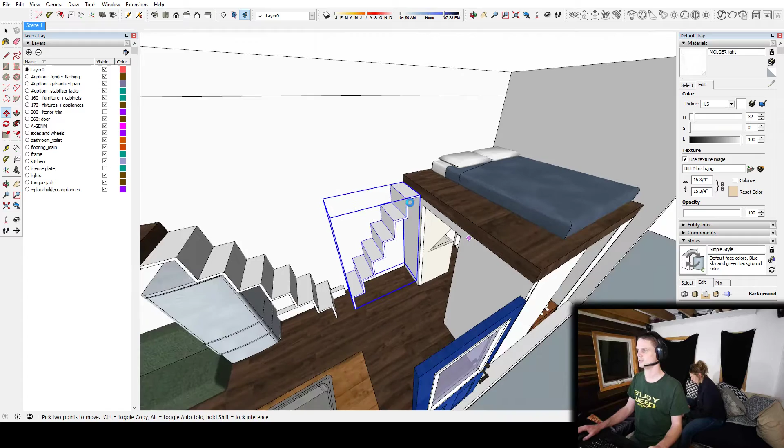It's good. And then, I don't know, what I would do here is make an executive decision to shorten this. Even the whole wall probably needs about that much space. Okay, this moves over a little bit. The door, tuck it over as far as it can go, bang on like that.

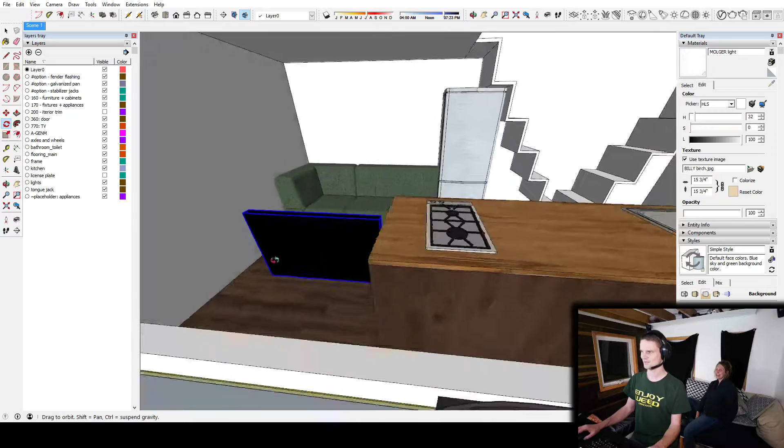So pretty close to wrapping it up here. I've made some executive decisions. I'm putting in a screen. You would have never guessed. This could be kind of cool because look at that, it fits perfectly.

Kind of like this design actually, it's nice. So window here, nice big window, like that. Could do like some kind of crazy tall window here, or like a circle window. Okay, do a tall one, and got a circle, a big ass circle. Now you have done it, that actually is sweet, that looks good. Yeah, that's dope.

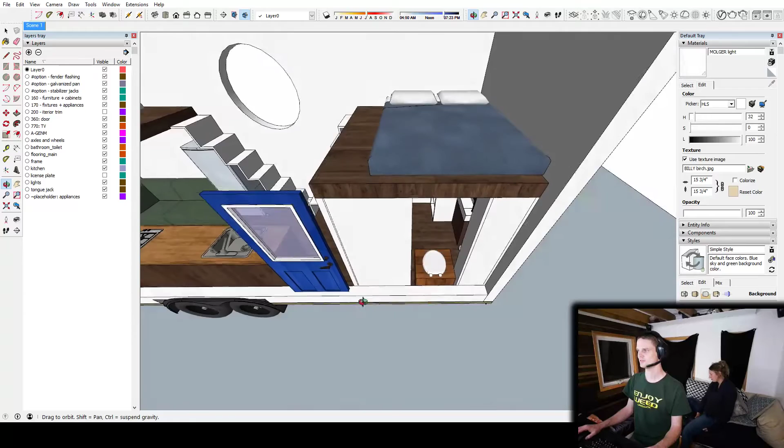Maybe not a window across from the throne. What about one over the throne, yeah. I'm just gonna hide this. No, I'm not.

And some windows up here, some egress windows, some kind, just trying to make it so that it's reasonably cool and not like a white coffin. I would put one here, but it creates glare on the TV. I'll put one, you just put blinds, some really good blinds.

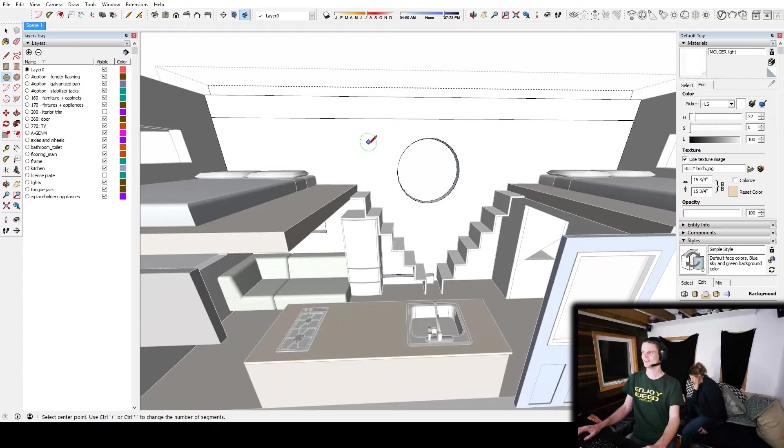Yeah, I want to just leave that one window. I was gonna put like two little windows up here, not that small, but yeah. I don't know, little portals, but I like the big circular one.

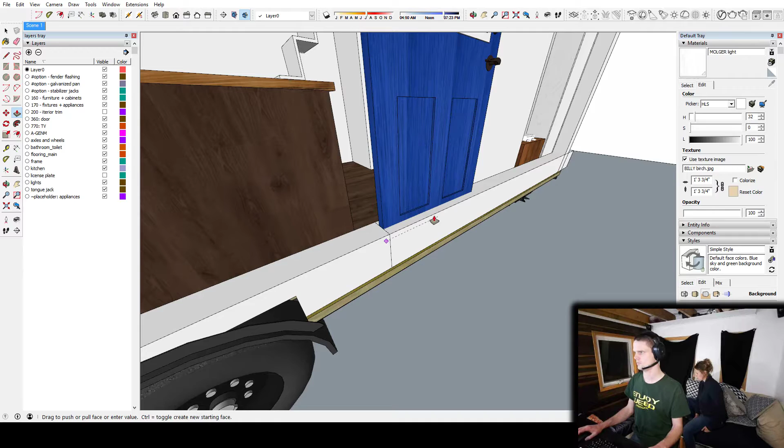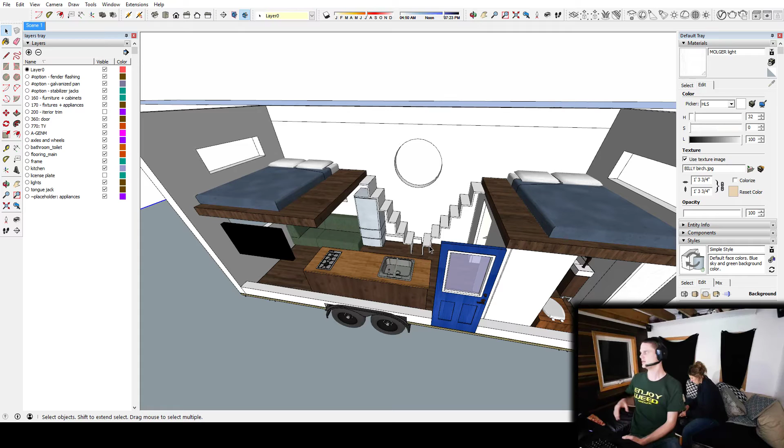But in addition to that normal 360 thing, if you spend $10 on something like the Google Cardboard, or $30 on this particular one which is really good, just a little phone holder—there's tons of different options out there—basically a cheap apparatus to hold your phone and give you the virtual reality view, you can actually put it on and stand inside different tiny houses.

And the way I'm creating them, there are waypoints so you can explore the entire space. It's really awesome because in a tiny house specifically, it's super valuable to feel the space—no number of photos can really give you a sense of it.

We've been talking to some people about how sometimes you'll get a really wide angle lens shot inside a tiny house to try to show as much as you can, but that actually warps your perception of the space because it looks bigger than it is, since the image is stretched. So putting on virtual reality and actually being there, looking around and seeing how close things are to you, is going to be super awesome as a tool for people interested in tiny houses.

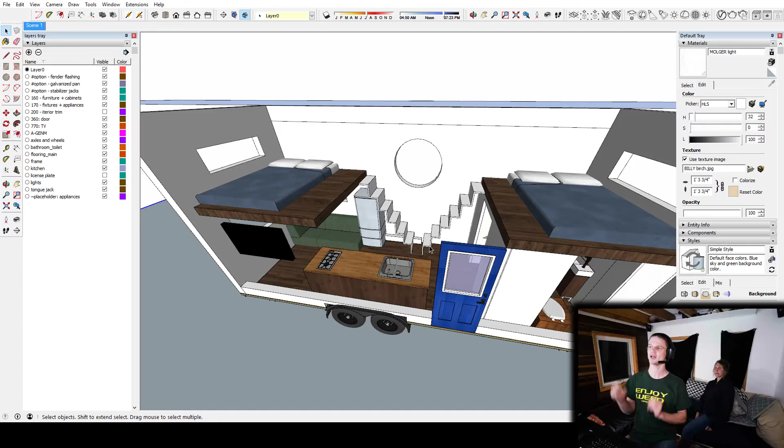So anyway, we're working on this tool, and I'm rambling about it, but in the future once we get it all up and running, we can do a live stream like this, take the model we've created, and in like 15 minutes I can have a virtual reality version of this live on our website that you guys can then go into and stand inside this house we just created together on the live stream. So much hype—keep an eye out for this as we get it ready. Hopefully we'll have it available for you guys to try out very soon.

Should I stop talking? I don't even know what I just said—I'm just rambling. But yeah, I think we're done. Are we done? Yeah, we're done. I need to manage this stream better because I just go off on random tangents. We need to pack and get ready, because we're leaving for Texas, and it's the day after tomorrow.